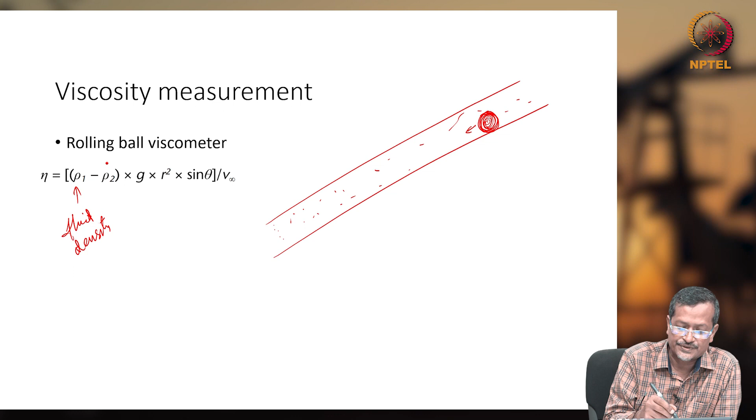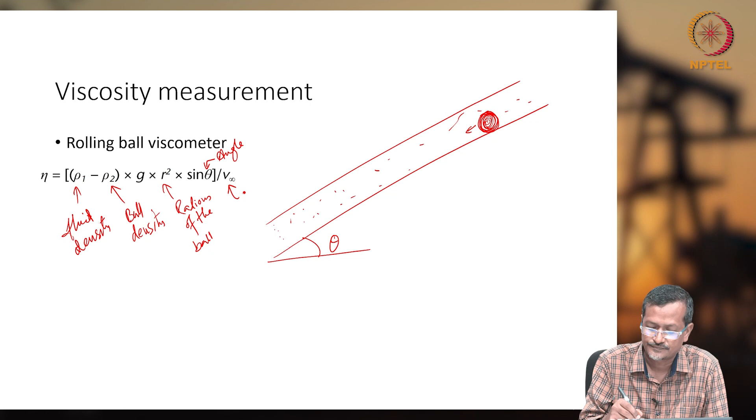So in this way, you can measure how much viscosity is in the fluid. There is a formula for this rolling ball method: rho 1 is fluid density, not viscosity, and this is ball density. G, as you know, is acceleration due to gravity. R is the radius of the ball, theta is the included angle, and V infinity is the settling velocity of the ball, and eta is the viscosity.

Now, what are the forces acting? When the ball is moving down, viscous force will be trying to move it up. Gravity force is working downward, moving it down. Buoyancy force will be there trying to move it up, and viscous force will resist, trying to stop it, while gravity force tries to pull it down. So gravity and buoyancy force both work in opposite directions, but the ball will still try to move because of this component of gravity force.

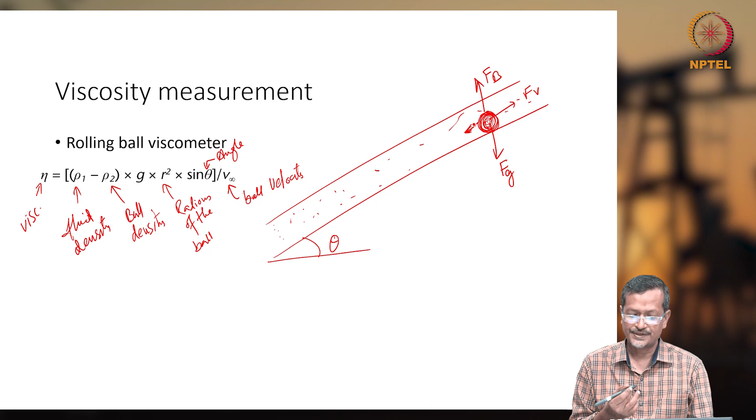If you have low viscosity, the ball will be moving quickly; if very high viscosity, it will move slowly. So from this distance to that, you measure how much time it is taking, and distance divided by time gives you the velocity. So if you get that velocity, from that velocity you can calculate viscosity. Now you can take any fluid, let's say reservoir fluid or fluid on the surface, and play with this ball to get the viscosity amount.

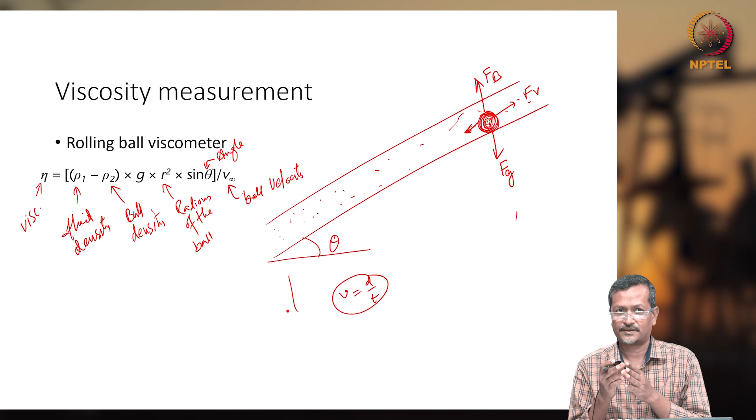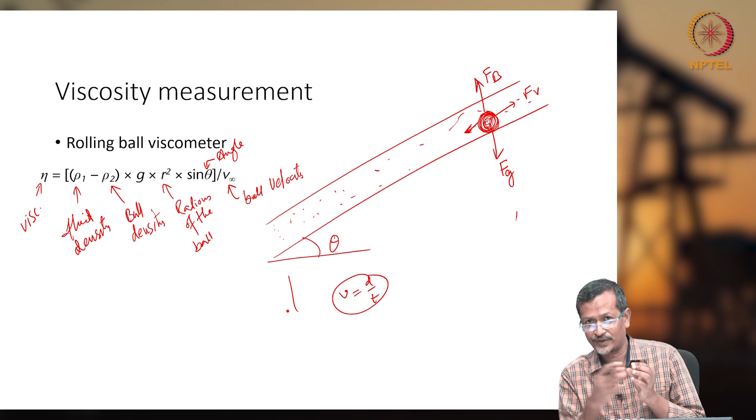This viscosity, when you measure, will be used by artificial lifting people and surface production people, because it is resistance to flow. Viscosity means resistance to flow, and the opposite of viscosity is fluidity, how quickly it can flow. If you know resistance to flow, accordingly you have to design your pipeline system, select your choke, select your surface separation systems, select your artificial lifting system, your valve mechanism. All these things will be based on viscosity.

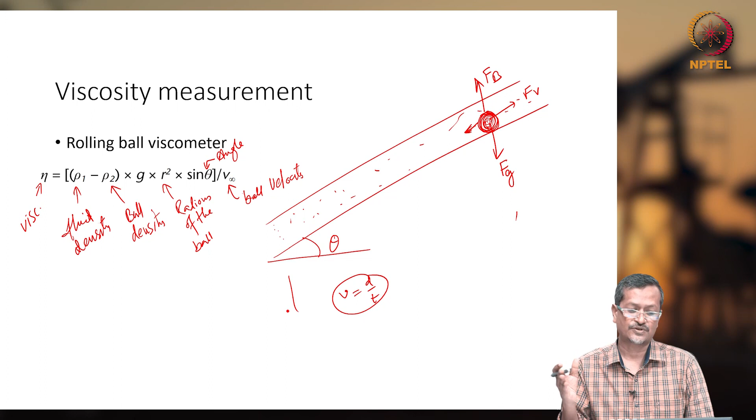Sometimes I give an assignment and ask the student to use this formula to calculate. Maybe some terms will be unknown, some will be known, and you have to understand how to solve it. There are some terms I have to explain.

RS is the solution gas oil ratio, P is pressure, PB is bubble point pressure, in PSIA. Mu OB is saturated oil viscosity. Why saturated oil viscosity? Because when bubbling starts, at that point what will be the viscosity, the formula is here.

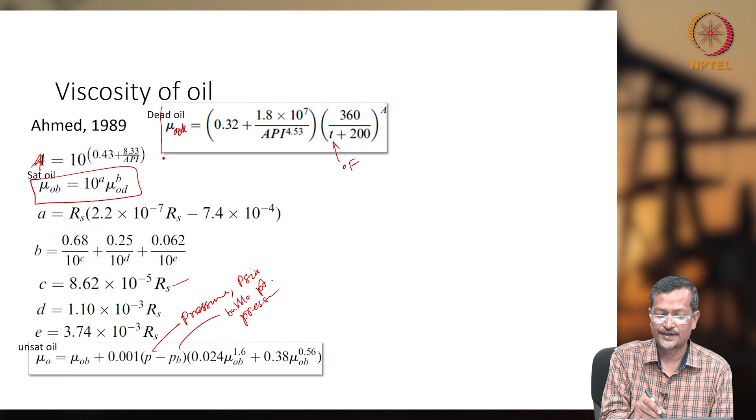This is dead oil viscosity. And unsaturated oil is when temperature and pressure are managed such that it is above bubble point pressure, that it is unsaturated. That means it needs more oil or more gas to become saturated. So saturated and unsaturated definitions are like this.

You take a certain amount of oil and gas mixture at certain pressure and temperature, and you reduce pressure. Once you reduce pressure, bubbling will start. At the moment bubbling starts, you assume this liquid is saturated, and this is the bubble point. But at the same temperature and pressure, if it can absorb more gas, then it is unsaturated. But if a certain fluid you have also has free gas above it, that means it is already saturated because extra gas is still there.

Again, the equation is very big, so remembering it will be difficult. So what will I do in the exam? I'll give some correlations and keep something missing. So if you do not practice, you will have difficulty. Better you practice with this formula on given problems, then you can solve it.

There is one correlation relating oil viscosity, pressure, and viscosity, mu. It becomes like this.

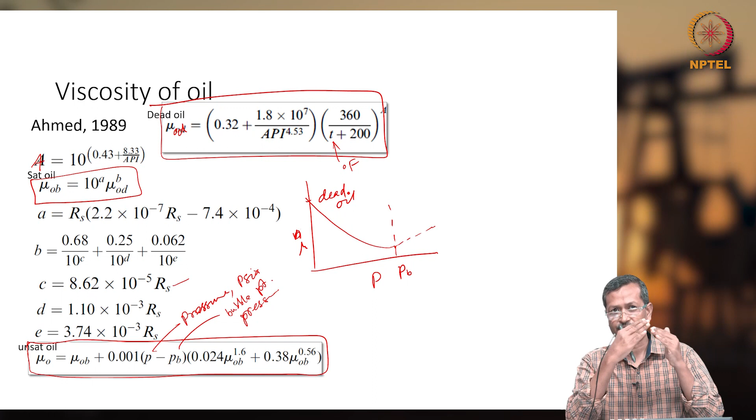If you reduce pressure up to bubble point pressure, viscosity normally will go down. Then, when gas is released, viscosity will go up again. At dead oil condition, dead oil will have higher viscosity. But when you take a fluid above bubble point condition, as you release pressure, viscosity will go down, because the molecules get more space and create less resistance to flow. So viscosity will go down, then bubbling will start. When free gas is moving out from the liquid, viscosity will go up, up, up, and reach maximum when it reaches the dead oil condition. Dead oil condition means surface condition: 14.7 psi, 60 degrees Fahrenheit.

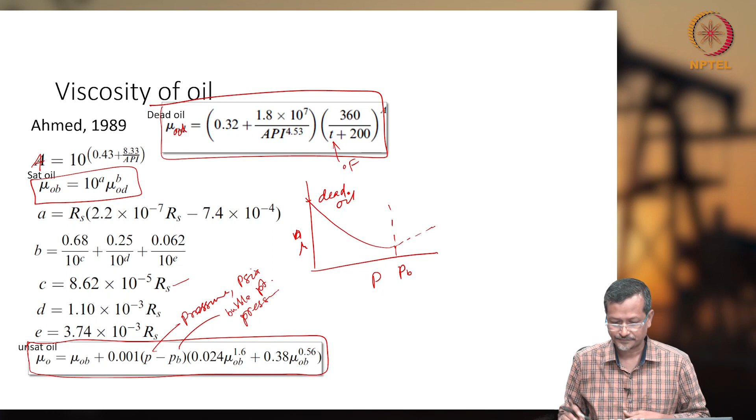We will go to the next topic: oil compressibility. You take a certain amount of fluid mixture from the reservoir to the surface. Because of pressure change, the fluid volume will change. If you see the formula, it is the compressibility formula. The unit will be psi inverse, because here you see del V at top and del P at the bottom. So it will be inverse of pressure, and it will be at constant temperature, isothermal condition.

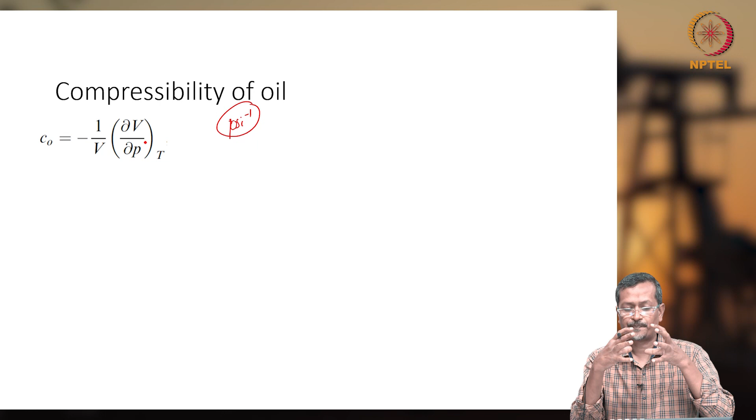Why does the compressibility change? Because at high pressure, the atoms will be compacted and come closer to each other. When you release pressure, the atoms get more space, more resonance space, so they take more volume. That is called compressibility.

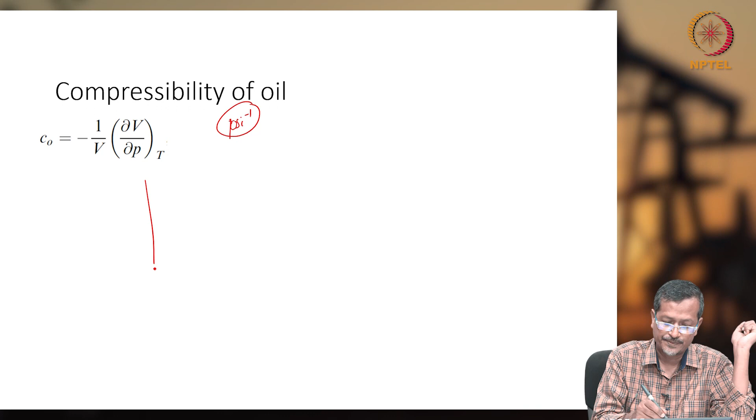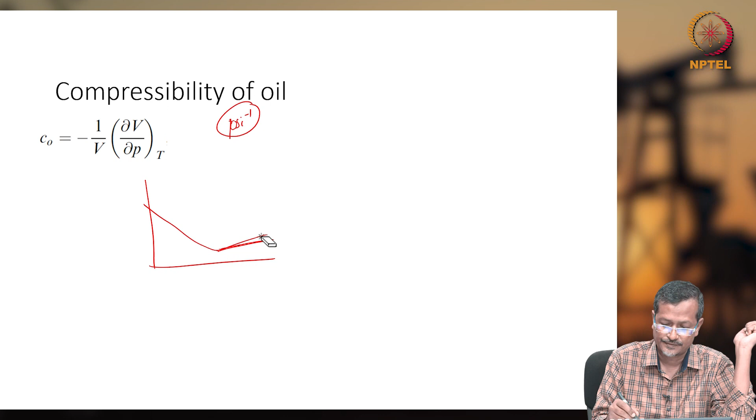So if we draw the picture for compressibility, it is like this: P on the axis, almost constant, this is psi inverse, and this is PB, the bubble point pressure.

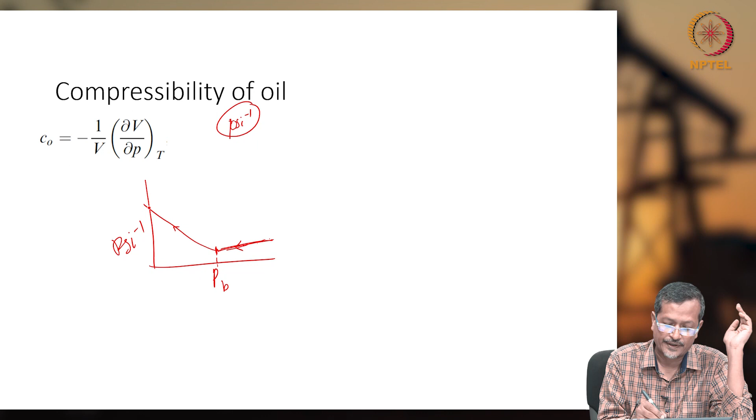So when you reduce pressure, compressibility will go down. Once it reaches bubble point pressure, compressibility will go up again because lots of gas will be released. The free gas is released, so compressibility keeps going up and up. So when dead oil is there, it will have maximum compressibility.

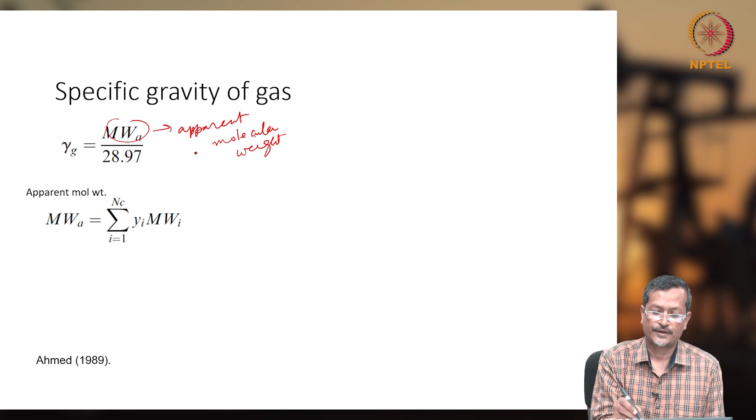Now, specific gravity of gas. When I talk about specific gravity of gas, we have to know the molecular weight of a gas, or apparent molecular weight. This is called apparent molecular weight, and 28.97 is actually air molecular weight.

If you have gas, natural gas or gas coming out from the wellbore, it will have multiple components. Multi-components means it is not a single component fluid. That means you have to see how much percentage of each component is there. So for that we have the equation: apparent molecular weight equals sum over NC number of components of Yi, the fraction of the molecule, times MWi, the molecular weight of each molecule. Then you calculate apparent molecular weight, MWA. This formula is available in Ahmed 1989.

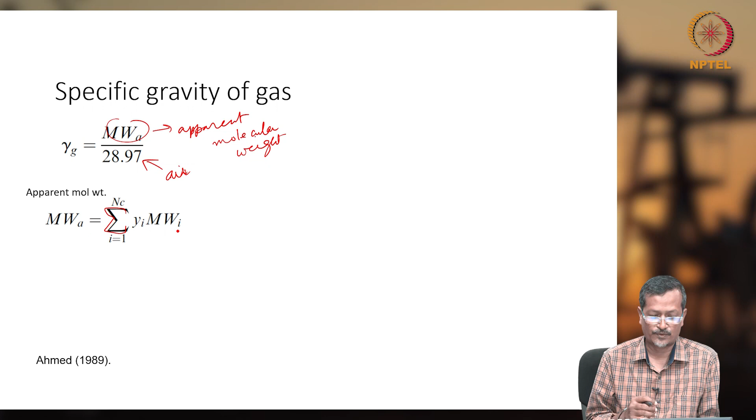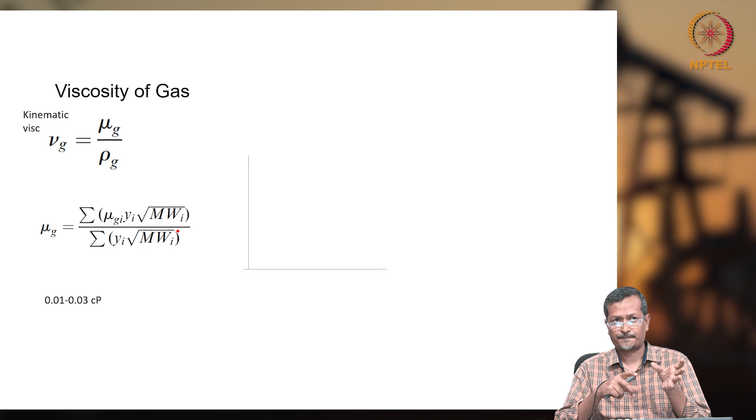Gas viscosity. Oil has its viscosity - oil will try to flow, but because of viscosity it will get resistance. Gas also gets resistance, but since gas is a lighter molecule, its viscosity is not as prominent as liquid viscosity. Gas viscosity is around 0.01 to 0.03, so very low viscosity. But you still have to know the viscosity formula, because whenever you are designing a system, a small change in viscosity will affect the whole system performance.

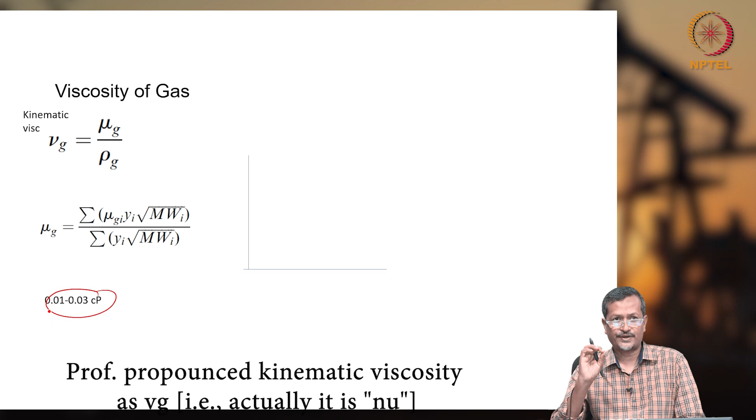One formula for gas viscosity: kinematic viscosity nu g equals mu g by rho g, and you have to note the units. If you do something wrong with units, there will be a problem. The poise or centipoise is the basic unit - 1 centipoise is water. If you are talking about kinematic viscosity, that is centi-stoke. Normally the kinematic viscosity term is not used, only dynamic viscosity.

Dynamic viscosity is used for all calculations in the oil and gas industry, but you should know how to calculate it. If kinematic viscosity is given, you have to calculate dynamic viscosity using mu g divided by rho g - mu g means gas viscosity, rho means gas density.

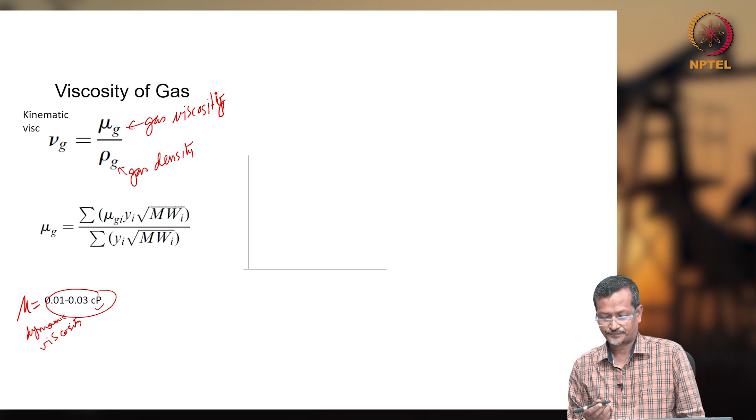And if you have multiple components, you have to use this formula: gas viscosity of component 1, percentage molecular weight divided by percentage molecular weight, square root. This formula will hold. And if you see the common relationship in a graphical plot, it will look like this.

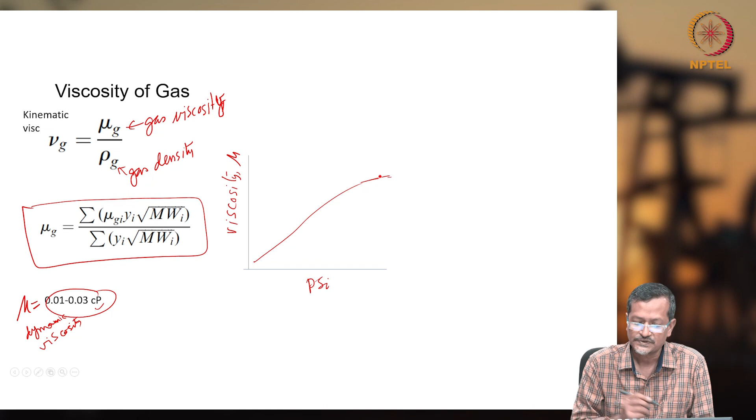In general, viscosity means dynamic viscosity, mu. So viscosity, and this is psi, pressure. Normally if you increase pressure, viscosity will increase. Why? Gas molecules are separated, right - it is not close like liquid.

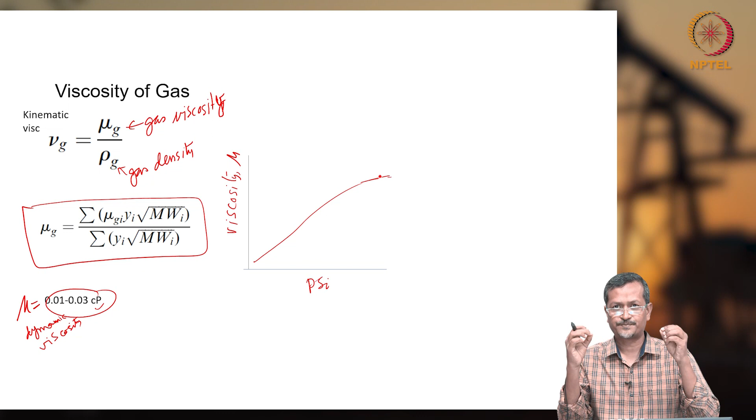So if you increase pressure, gas molecules will come closer and have more collisions. Because of Brownian motion, gas molecules collide - lots of collisions, randomly moving here and there. When collisions increase, it actually increases viscosity. Similarly, when you increase temperature, you get higher viscosity, because increasing temperature means giving more energy to the particles, so they move much faster - faster collisions, viscosity increases. So viscosity is basically a function of pressure or temperature.

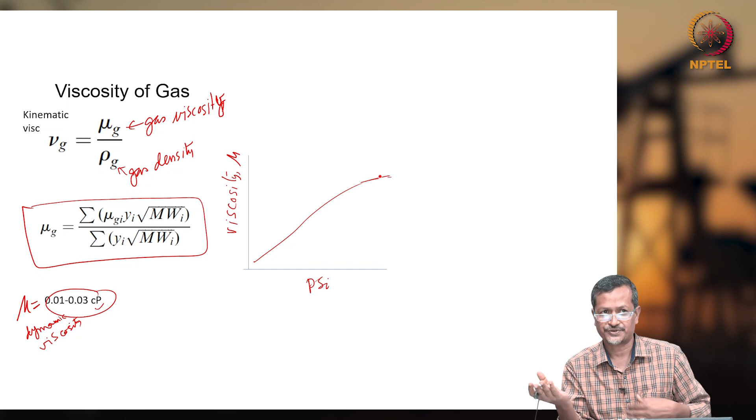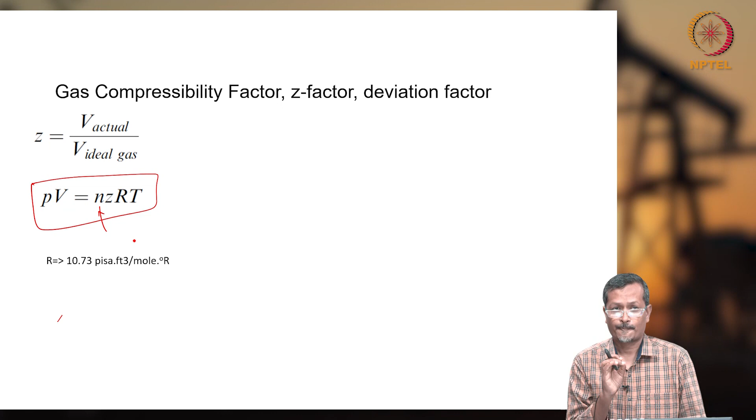And the formula from PV equals RT becomes PV equals Z N RT, where N is number of moles, and you have to check units again. If you do not convert units properly, things will go wrong. If pressure is in psi, volume in cubic feet, and temperature T in Rankine per mole, then R value will be 10.73. If you change units, the R value will change too. You must remember that R is dependent on units. So if you randomly Google search an R value and try to calculate, it may be wrong - first you have to see which units they are using, and based on that your calculation result will come out. Next is density.

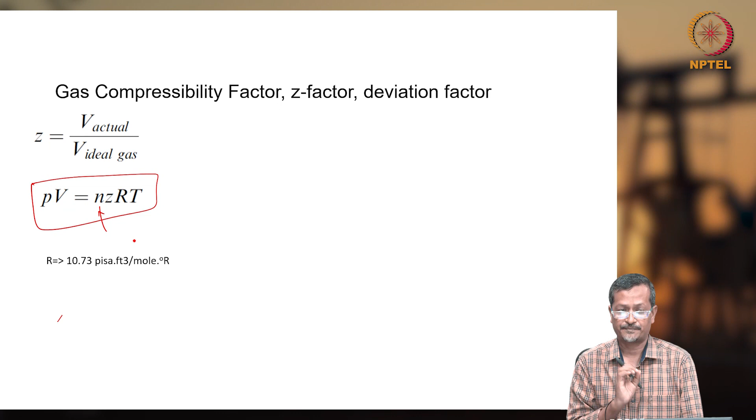Density means particles are far apart from each other because it is gas. Now when you increase pressure, the particles come closer, so density increases and viscosity increases. So both temperature and pressure will affect this. At high pressure, density will increase. If volume is the same and pressure is increasing, density will increase.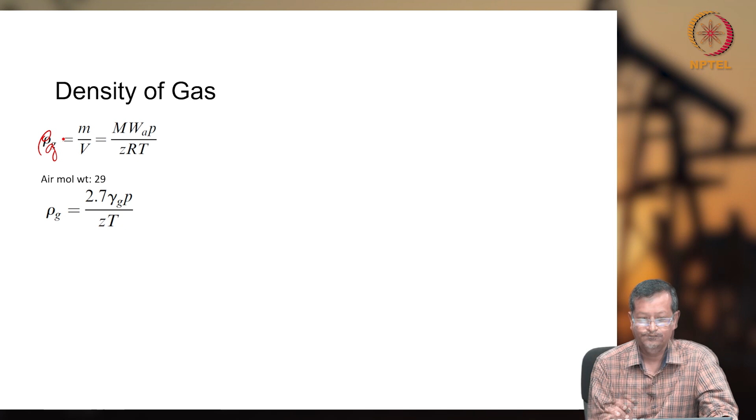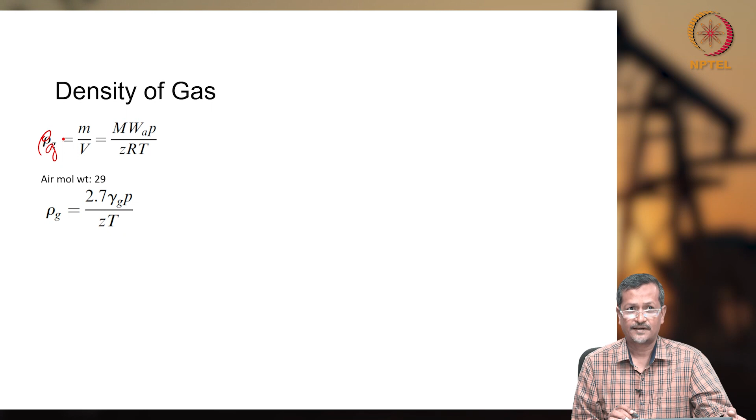Now what is the formula? Gas density rho g is m by v. Simple formula: mw is apparent molecular weight, p is psi, z is compressibility factor, T is Rankine temperature, R is universal gas constant. And if you are assuming air molecular weight is 29, then rho g will come like 2.7 gamma g p by z T. This relates to gas formation volume factor.

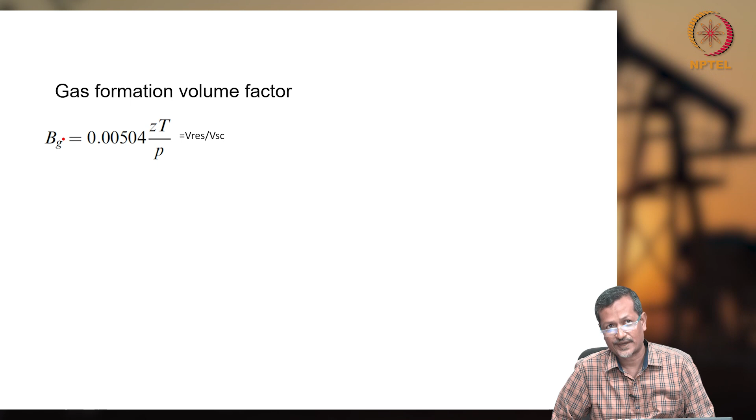So when gas is taken from wellbore to surface, from reservoir to surface, its formation volume factor will also change, but we are assuming this is gas throughout. Gas means during reservoir condition also it is gas, and at surface condition also it is gas. How does the volume change? It is like this: this is single phase gas, so psi and gas FVF, formation volume factor, for dry gas.

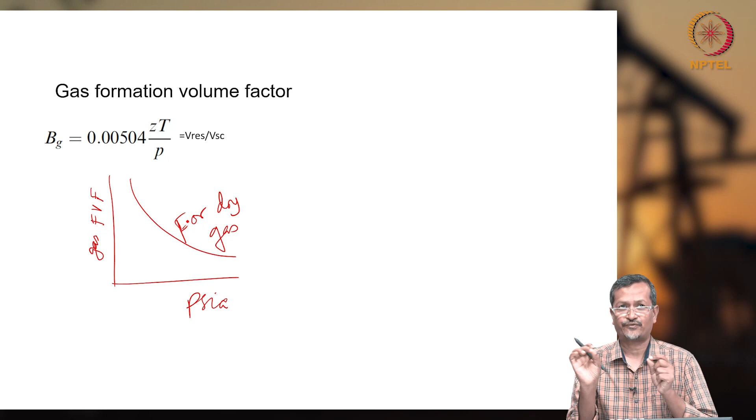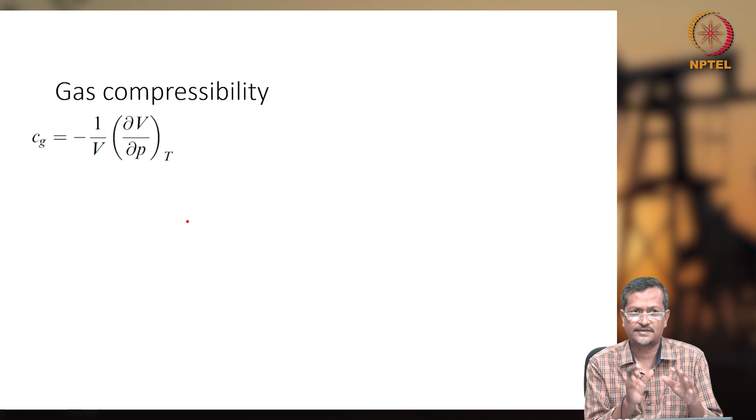So if I give any problem on formation volume factor, you have to check whether it is for oil or for gas. You have to know how much compressibility will be there due to pressure change and temperature change. The same compressibility factor definition applies as for oil: Cg is inverse of pressure, 1 by V minus 1 by V del V by del P. Because of pressure, volume is going down, that's why the negative sign is there, and this is isothermal compressibility.

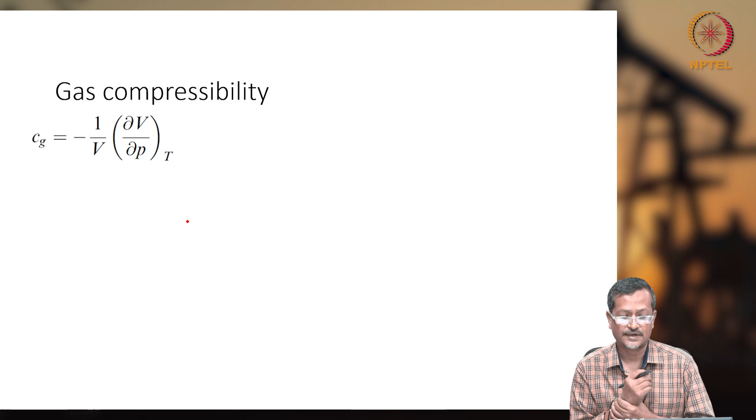These properties are required for artificial lifts. You have a certain amount of fluid, and when fluid is moving up to the surface, it is changing phase, changing volume, changing density, changing viscosity.

Let's say you are designing one PCP, progressive cavity pump, and you have lots of gas. Initially you thought a single phase liquid PCP would work fine, but because of phase change, if you draw the phase diagram, pressure and temperature change causes phase change. Because of phase change, you get some gas, and if gas interferes with the PCP, then the PCP will fail.

So your PCP, progressive cavity pump, is failing, meaning your production will be hampered and you will spend more money than you are producing in oil or gas. Or you are having a sucker rod pump. It may work well initially, but later you find it has lots of gas or changing viscosity. Because of changing viscosity, maybe more water came into the wellbore, or more sand came up, and because of that your fluid properties changed.